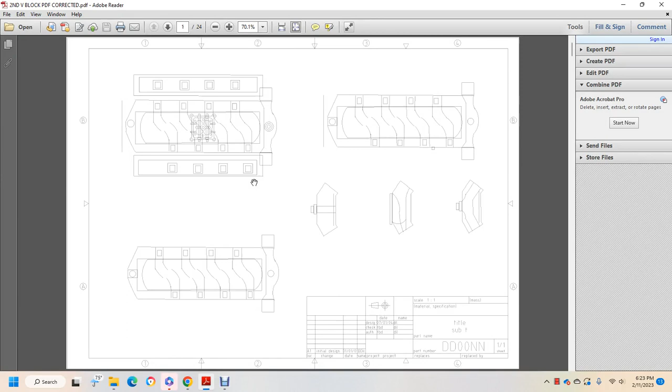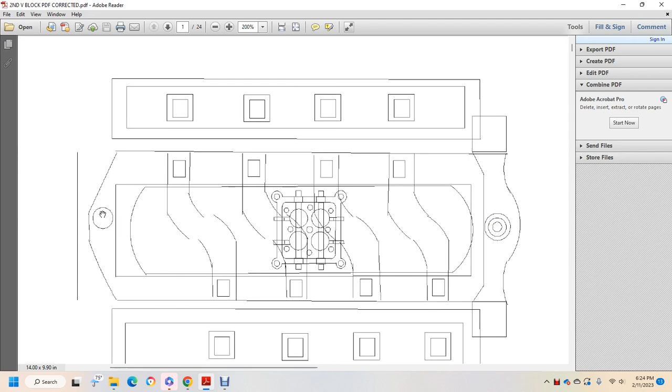Alright, we're looking at my second V-block motor that I drew in LibreCAD. I didn't have AutoCAD Desk at the moment when I drew this. As you can see, here's the intake carburetor mounting pad on the intake manifold. Over here is the thermostat in the front of the motor, and then a rod for the distributor to go down to the, and then these are your intake manifold ports, left side, right side bank.

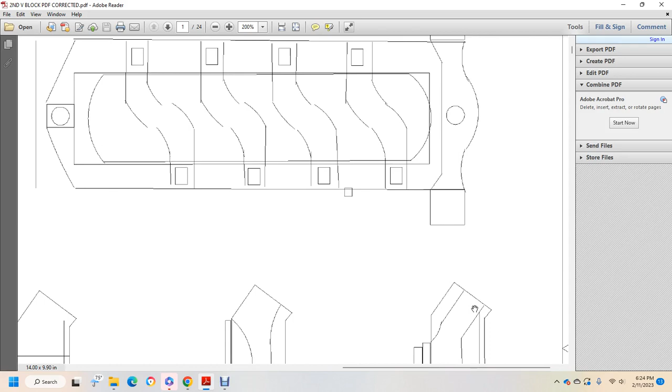And then this is it. It looks like over top, back side, bottom left. As you can see, this is the front view, front cut of the intake. This is the in between, and this is the back, which shows the stub rod.

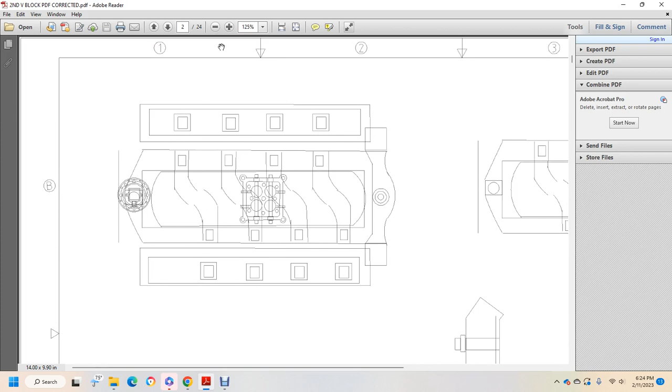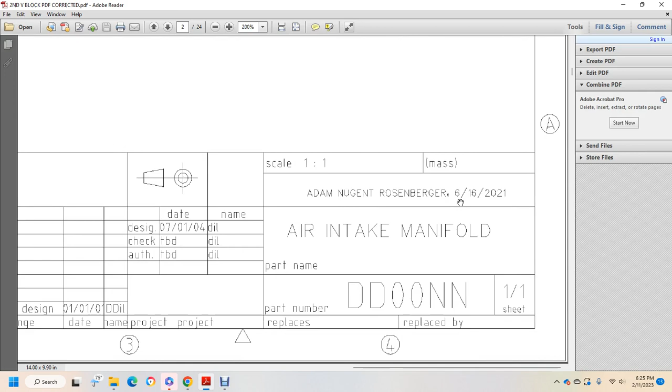Alright, once again, intake manifold. Now the distributor is labeled here, shown on the top. Distributor, thermostat, intake manifold for the carburetor to be mounted on, top view side. And this is, let's see if I labeled this, air intake manifold. I produced these drawings on June 16th of 2021.

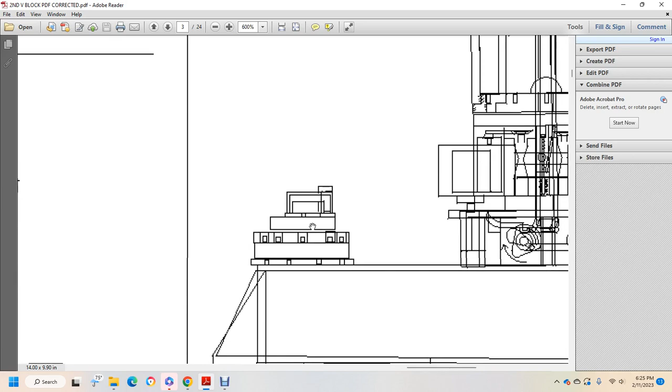This shows the carburetor on top, which I'll probably do a special video over. Throttle intake, 4 float, 4 barrel, 4 carburetor. Thermostat is drawn out, which I didn't detail in this position. Over here would be a side view of the distributor, and other side of the carburetor, also the other distributor, which goes through the intake manifold. You can see my cross-sectional lines.

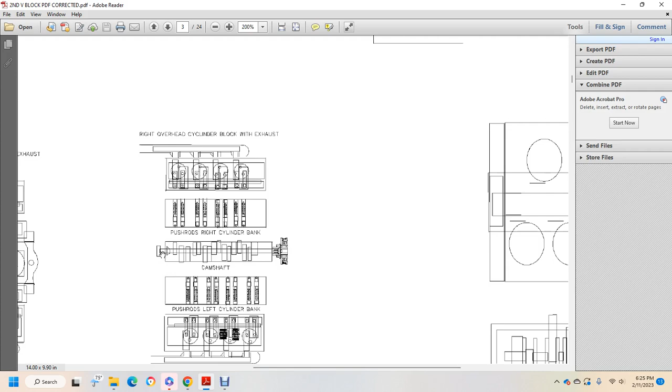Over here it shows the right overhead cylinder block with exhaust, push rod, right cylinder bank camshaft with a butt rod, push rod, left cylinder, left overhead, right block cylinder, left overhead cylinder block with exhaust. It shows the front view of the engine with the flywheel on, the push rods, manifold, exhaust, oil pan.

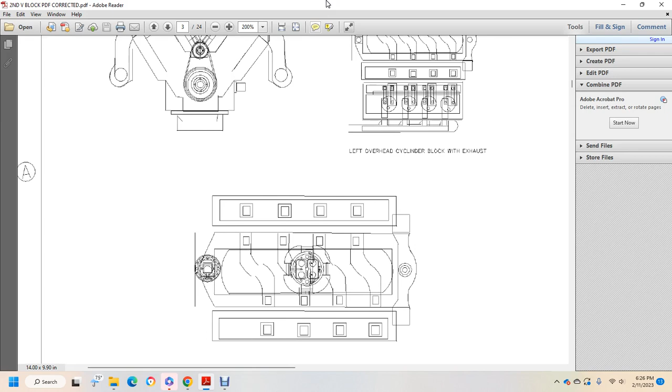This is what it looks like with the top of the carburetor mounted, and then over here, crankshaft. Bottom side of the V. Basically, this is at an angle. These are ellipses to show that it's at an angle. Crankshaft rod. Alright, this is the belt drive.

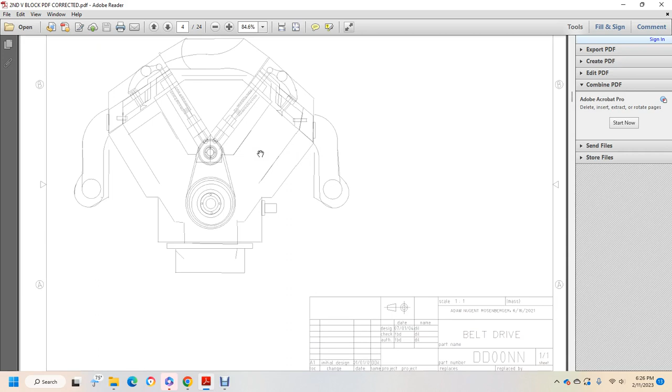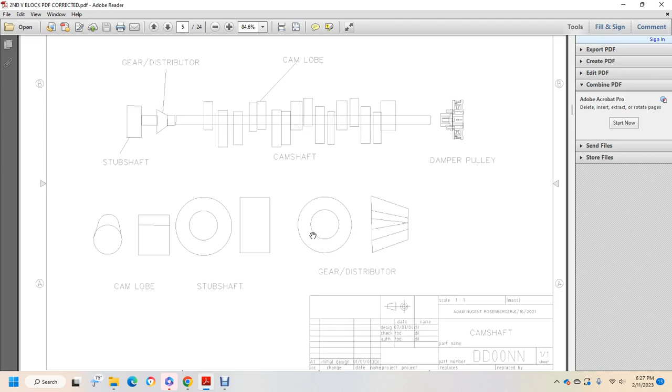Camshaft, gear distributor, stub shafts, cam lobes, camshaft, damper pulley, gear distributor, which is in the intake, stub shaft, cam lobe. This gear distributor on the camshaft turns the power, the distributor. Crankshaft at all different angles, quarter degree turns, and left overhead cylinder block, cylinder head gaskets.

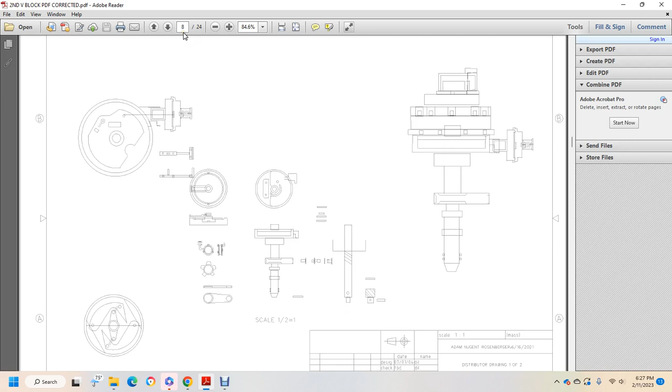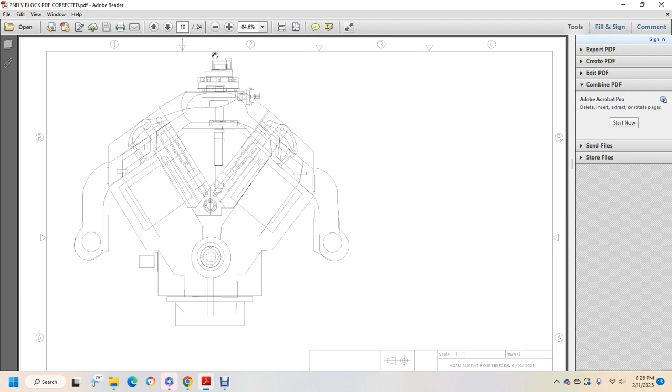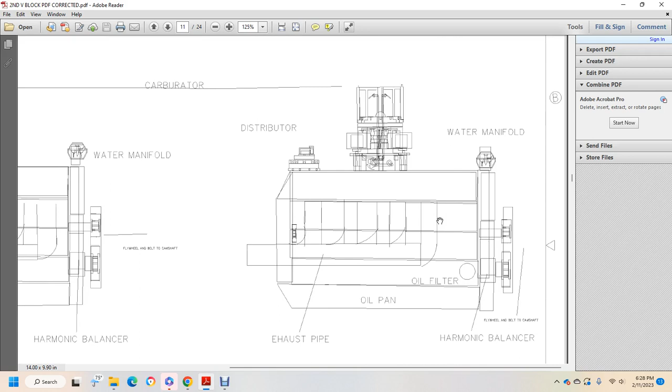There's your distributor mounted on top of there, in the middle, which comes down to the gear shaft right here. The gear stub will match the distributor, oil pan, oil filter. Alright, this shows the carburetor, distributor, water manifold, oil filter, oil pan, harmonic balancer, flywheel, and belt to camshaft, exhaust pipe, oil.

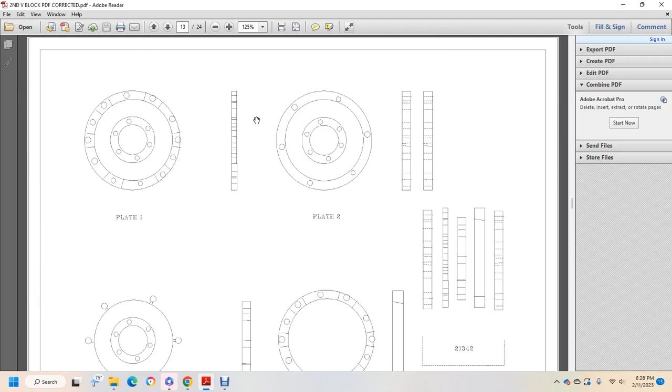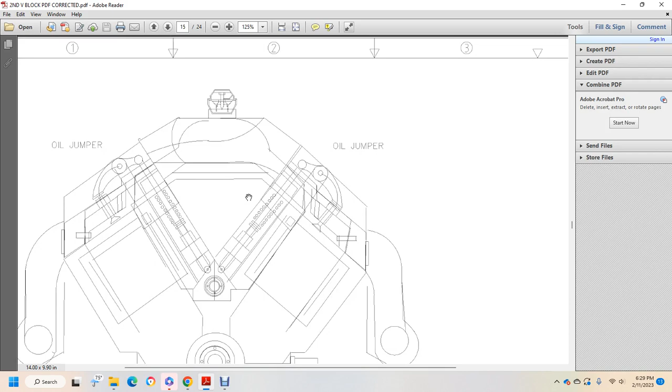Distributor. This shows the flywheel, harmonic balancer, which is pretty much the same, I used it over again. Your oil jumpers, which go up through the crankshaft, and it shows the oil filter, rear flywheel scavenger pump with the oil sump pump, oil jumpers, oil filter, oil pan, oil scavenger pump.

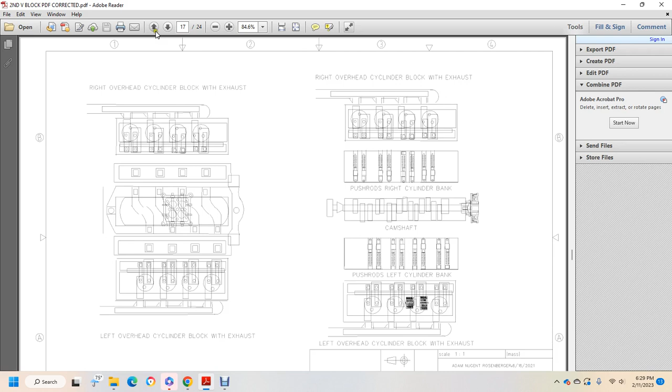What we have here. This is the oil pan. Left overhead cylinder block with exhaust. Right overhead cylinder block with exhaust. Left overhead cylinder block push rod. Push rod right and left cylinder bank with camshaft. Piston. Connection rod. Rocker arm lash adjusters and push rods.

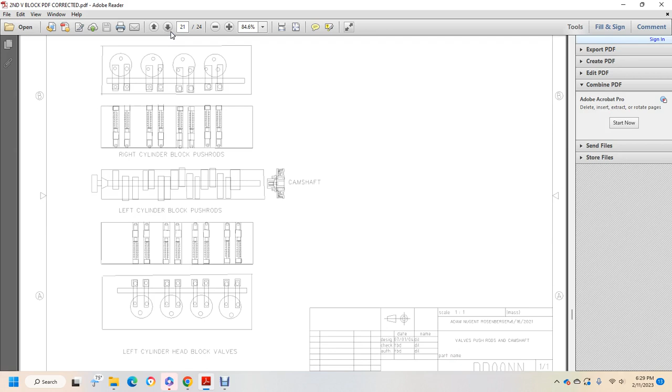Right cylinder block valves. Right cylinder block push rods. Left cylinder head block valves, camshaft. Then you see the carburetor on top, which I'll do in a second video. My own design carburetor, everything pretty generic motor except for some of the parts ideas. This shows the crankshaft turn gear cross-section view. This one with the connection rods and pistons.

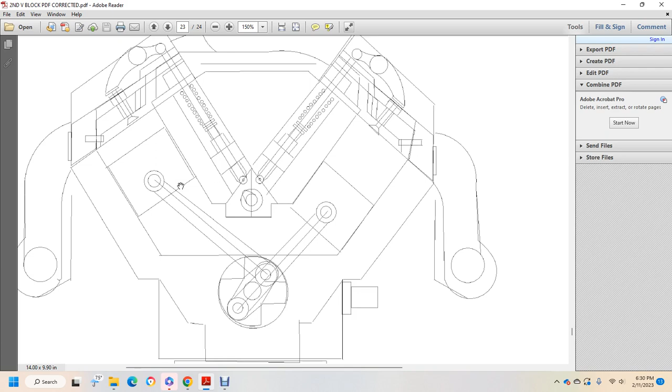And thermostat. Water jackets are in the cylinders. Water jacket overhead cylinder. Water jackets right head cylinder block. And that is the V-type motor, that second V-block motor that I did in LibreCAD.